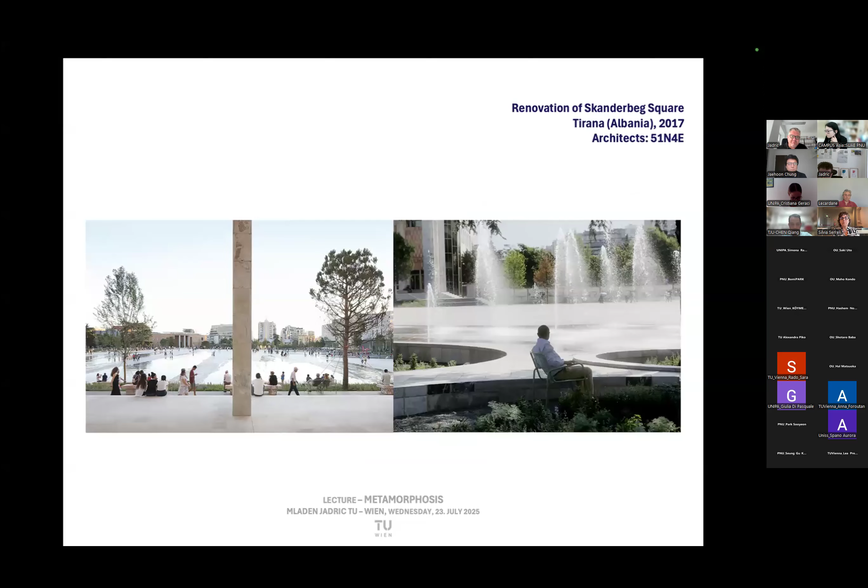It's extremely important that these public spaces have to be built and made for the citizens.

One example from Shanghai, the Suzhou Creek, back then in the beginning of the 20th century, it was one of the biggest industrial paths in Asia, if not in the world. I think 2.5 miles long, so really one factory after another.

Nowadays it's turned into a kind of cultural landscape with a lot of public spaces and nice areas for the citizens. Maybe just to touch on two interesting things, one is the shared space. We call it Begegnungszone, and we have it in Vienna as well.

This is a model actually coming from Copenhagen, somehow how to create a zone which is shared among all citizens without really having priority for the car like we had before. So here public transportation and pedestrians have real priority, and cars are allowed to pass through but at very reduced speed, with public transportation from time to time. But between the streets it somehow recovers and became again a public space available to everyone.

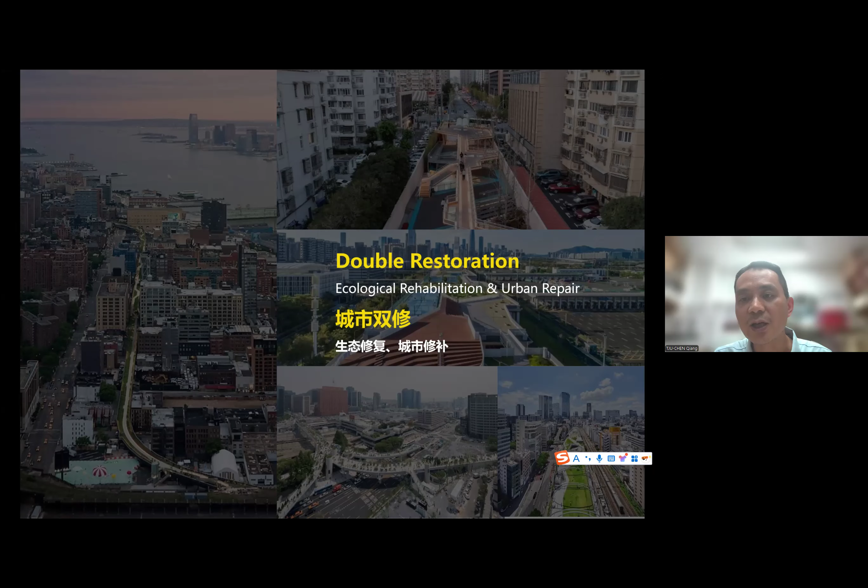The government proposed the double restoration plan 10 years ago, including two aspects: one is ecological rehabilitation, and the other is urban repair. Here is an example.

We will go to the first topic about ecological rehabilitation. During the fast urban development in the past, ecology and the environment were greatly impacted, resulting in a large amount of abandoned mining sites, industrial areas, and municipal facilities.

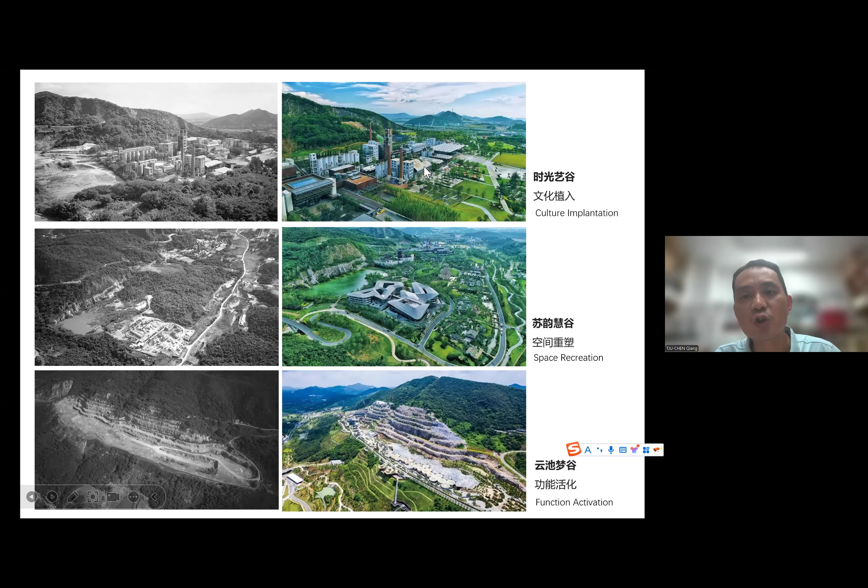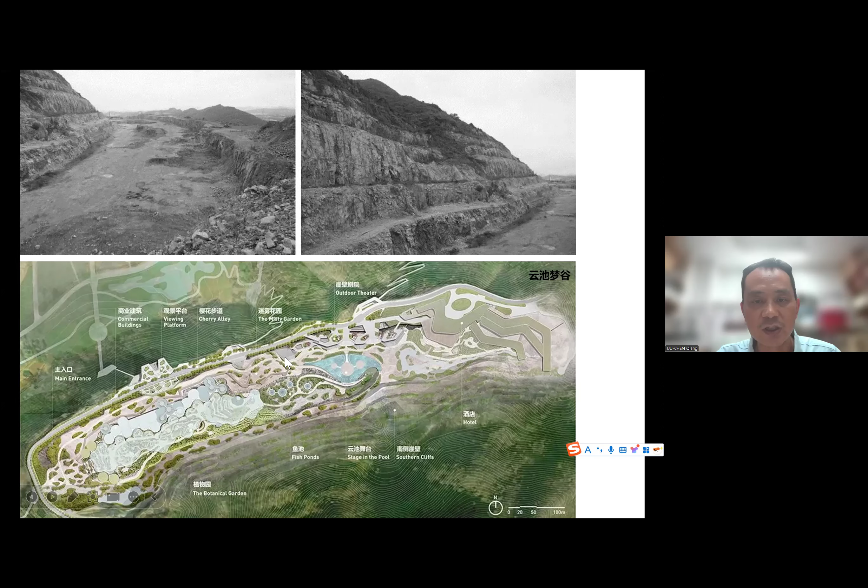Here is the previous image of the quarry. In the middle of the quarry was a botanic garden surrounded by a hotel, theater, pond, platforms, and commercial buildings. This is the botanical garden, covered by semi-transparent ceilings, just like wind in the sky.

You can see some of the silos were transferred into commercial space. This is an image taken from the hotel, and you can see the outside stones.

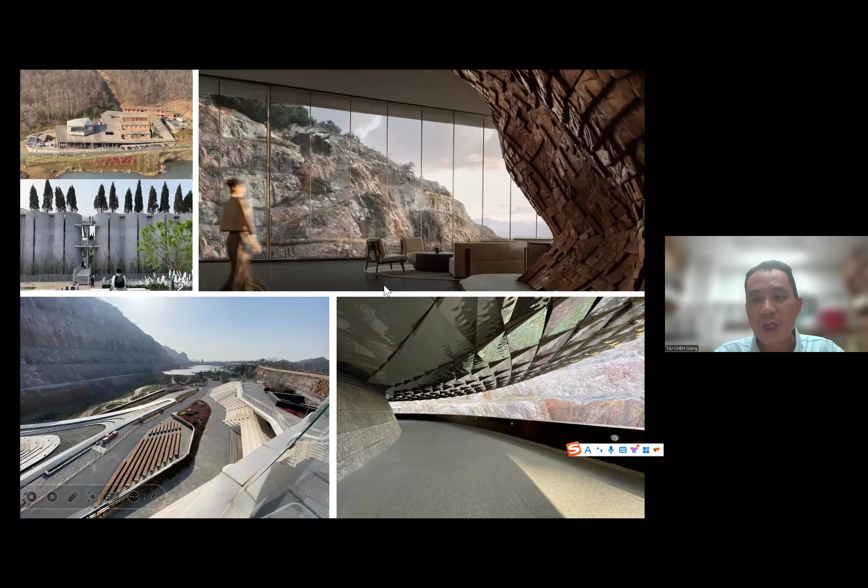So the big cliff is also transformed into the first realistic lighting show in the world at night.

Here is another example, the National Archives of Publication and Culture in Hangzhou. It is designed by Wang Shu, the first Pritzker Prize winner in China. You can see the small mountain was carved just like a basin.

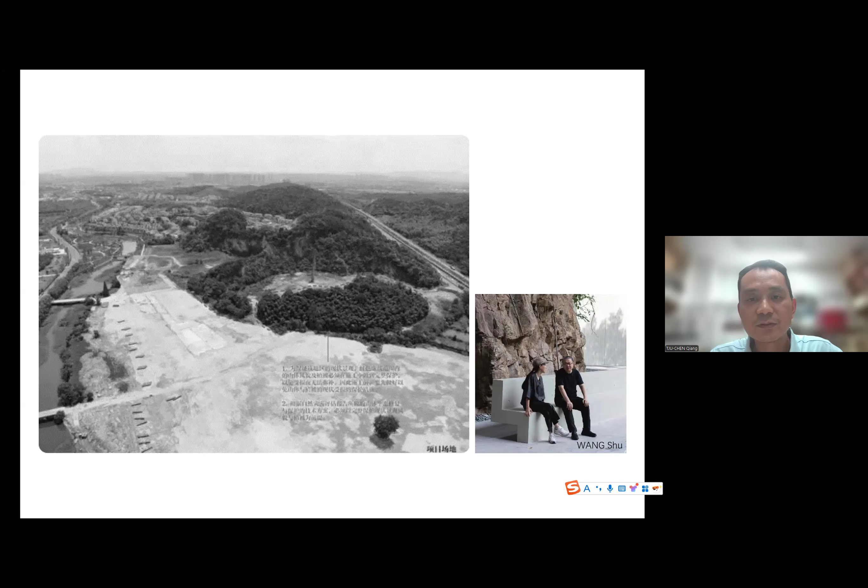The idea comes from Chinese traditional paintings. You can see in the middle there is a water pond surrounded by corridors along the mountain, and some pavilions located on the site. Some of the pavilions will be placed in the middle of the mountains, just like a Chinese painting.

So this will be a very wonderful landscape about the architecture and the environment. Also, Wang Shu will always do some experiments about materials, such as rammed earth wall, ceramic board screen, and timber roof. All these materials come from Chinese traditional ideas.

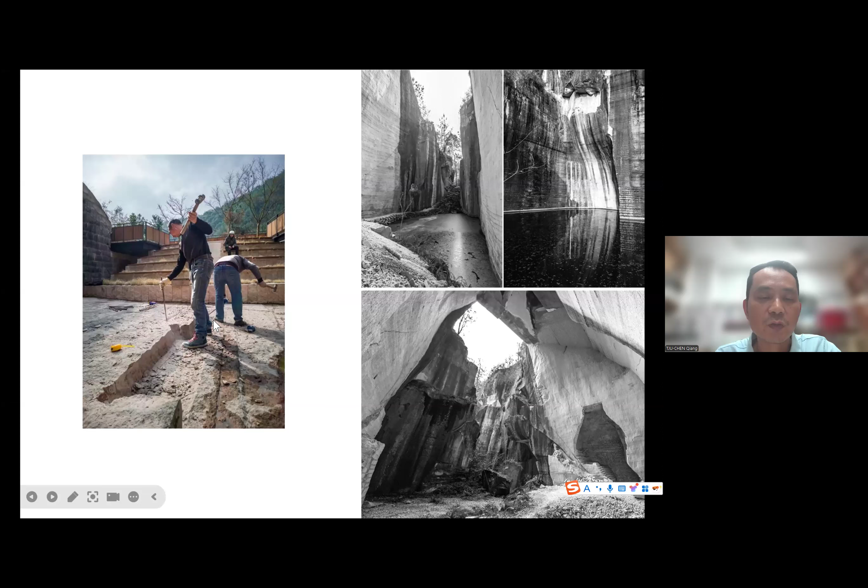Here is another project about the quarry. This is the better view of the Jiyun mountain. You can see there are many holes in the mountains. All these holes were dug out by the local people, just like this. The local villagers would get stone from the mountain, and a very special space was created, so it can be transferred into a performing space, a swimming pond.

Also a reading space. So it will be very interesting - the ecological rehabilitation will bring it about. We will rebuild the harmony between human beings and nature through ecological rehabilitation.

The next one will be urban repair. Here are three aspects about urban problems. One is how to deal with industrial heritage. The second will be wasted space and elevated roads. Also, we'll discuss traditional residences, such as Lilong in Shanghai, the courtyard houses in Beijing. So we should consider more about development and preservation.

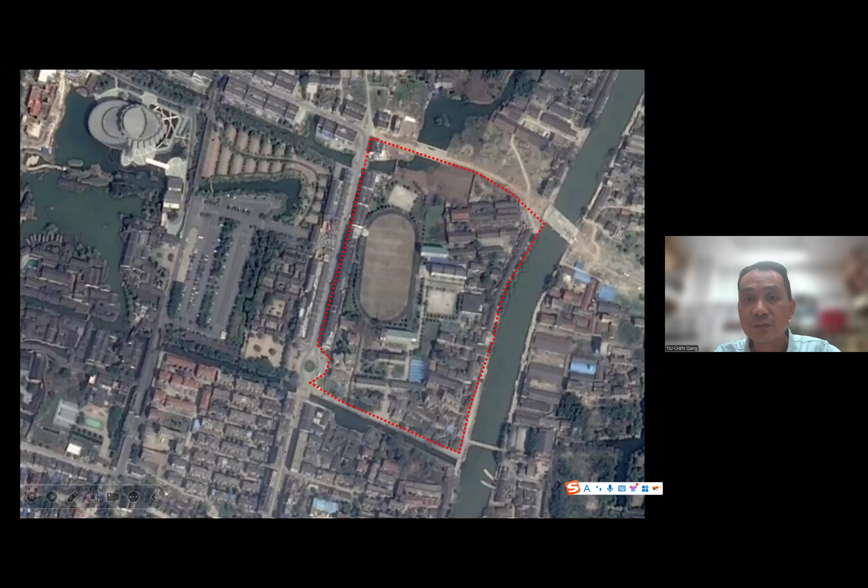So we designed 3 new buildings. This part is the old buildings, and we also kept all the trees. The first one is the entrance, small pavilions, and you can see an outdoor exhibition space was created by our new buildings and the old ones. Here is another new building - the main function is coffee and gift shop.

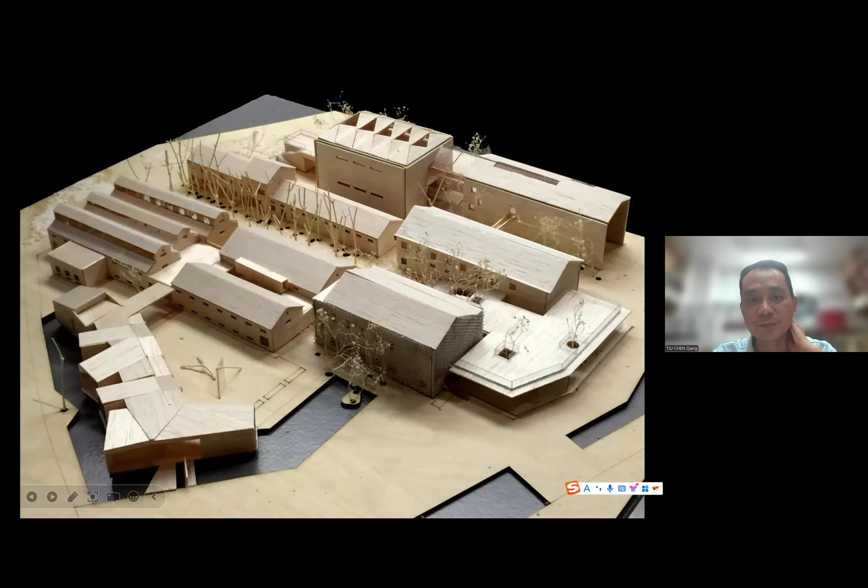The third one is the gallery, a new gallery along. And you can see there is an artistic space created by the old buildings and the new buildings. And this is the interior space - the old roof was all kept, as well as the structure.

In the middle, there is a waste garden, so we designed a big staircase with several holes to keep all the trees.

And this is the image of the coffee space. You can see the new buildings and the old buildings. The two-floor old buildings are covered with a semi-transparent mantle, and it will bring a new experience to the old buildings.

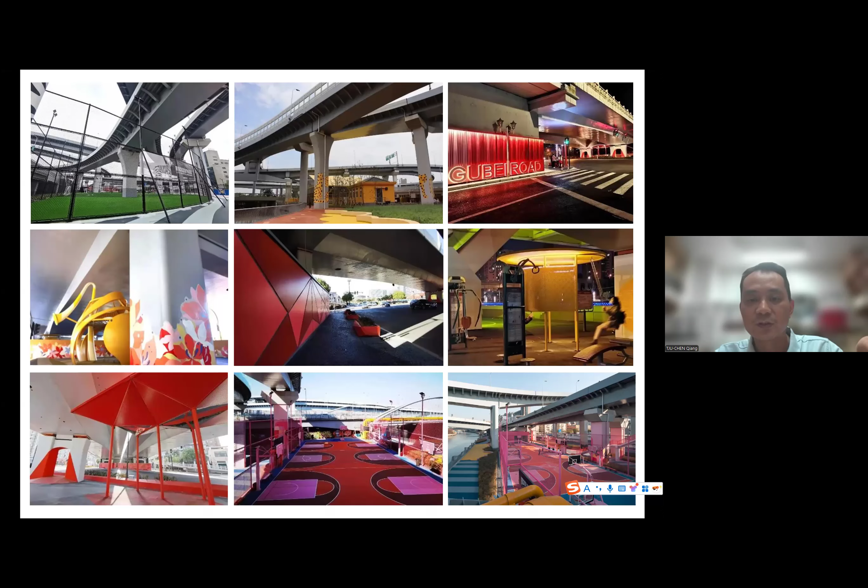Also, you can see mostly in Shanghai, the space under elevated roads will be transferred into sport space. Here is a very interesting case in Shanghai - a space under the bridge of Gubei Road. You can see there are some performing spaces and coffee shops. During the epidemic period 4 years ago, this space was used as a shelter for homeless people.

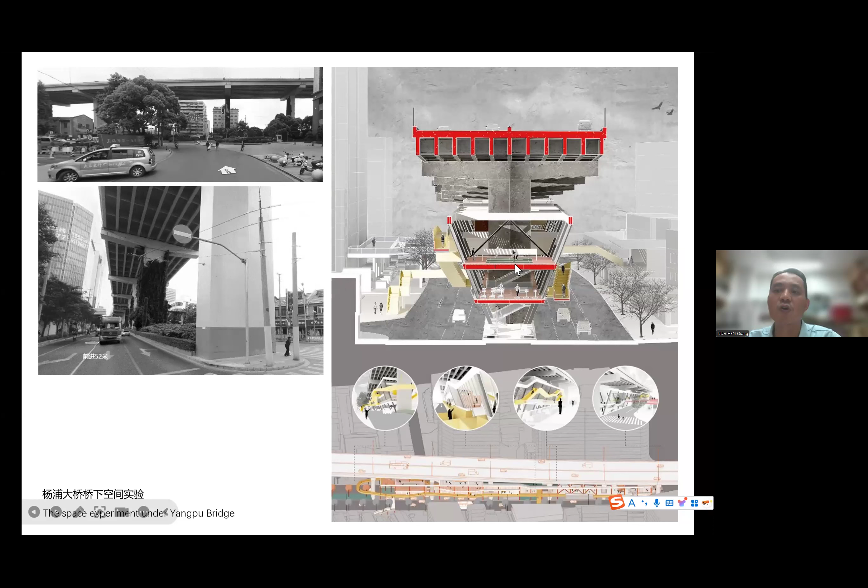We also direct our students to do some experiments about this topic. For instance, this is a case at Yangpu Bridge. You can see the road was very high, so how do we use the space under the road? It will become a sport space with three floors, and also a hub to connect both sides with bridges.

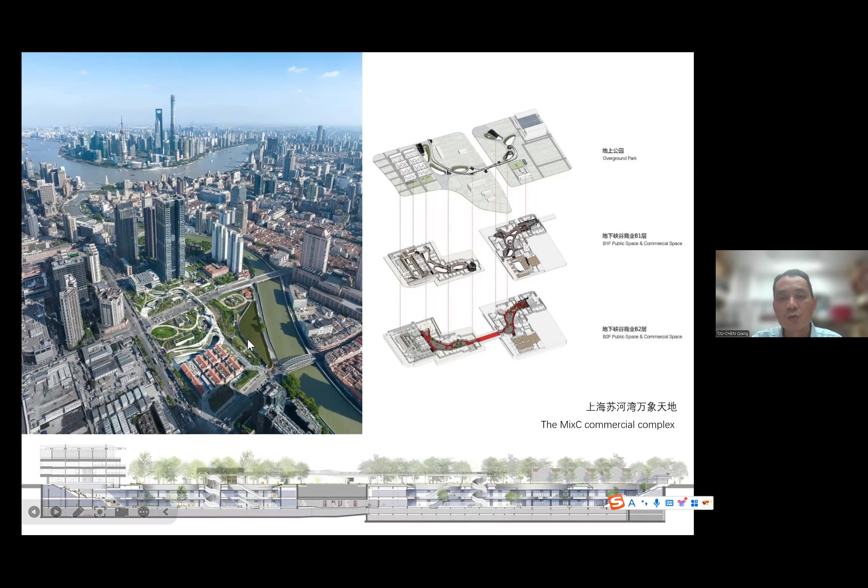As for the traditional residential space, this is a project about how to deal with them. This is the Suzhou Creek, and here is Huangpu River. Previously, this area was covered by the Lilong, a typical residential type in Shanghai. And now it is an open park.

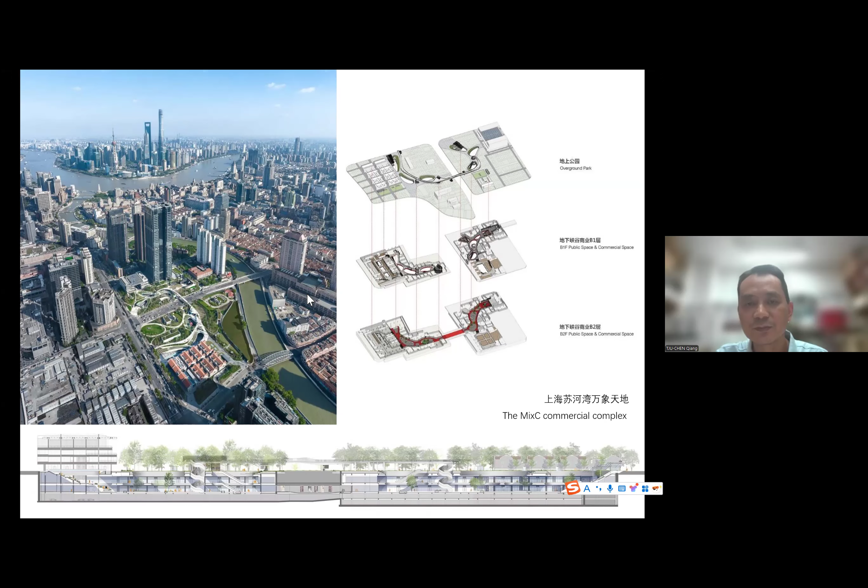But you can also see some small part of the Lilong. Here is a high-rise building designed by Norman Foster. Most of the space is used underground for special commercial space, and there are 2 floors underground.

And these buildings are not the old ones. They were just removed to leave space for the underground space, and then a new one will be constructed just like the old styles. Here will be the underground and the ground space.

Here will be another case about how to deal with the Lilong in Shanghai. You can see all the houses will be kept and will be moved to a different space. Also there are 3 floors underground space that will be used.

Some of the buildings are used for famous brands such as LV, Dior.

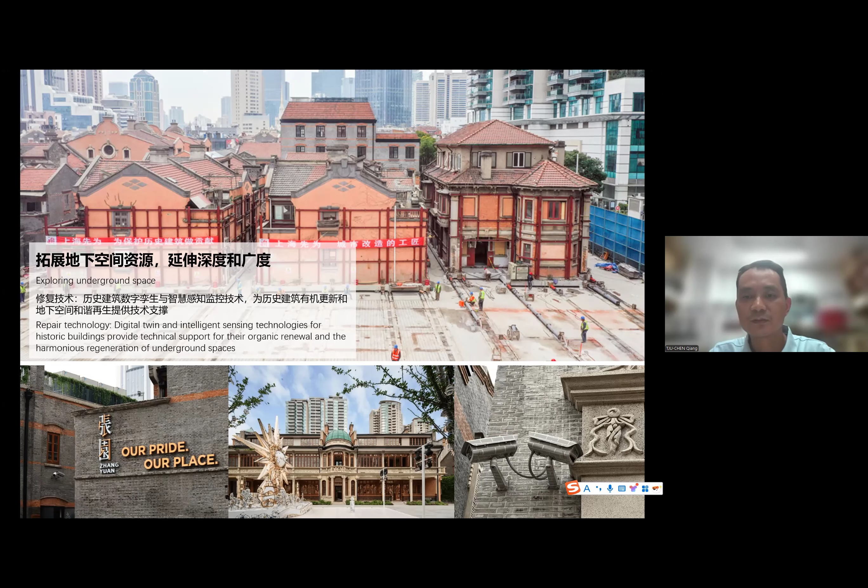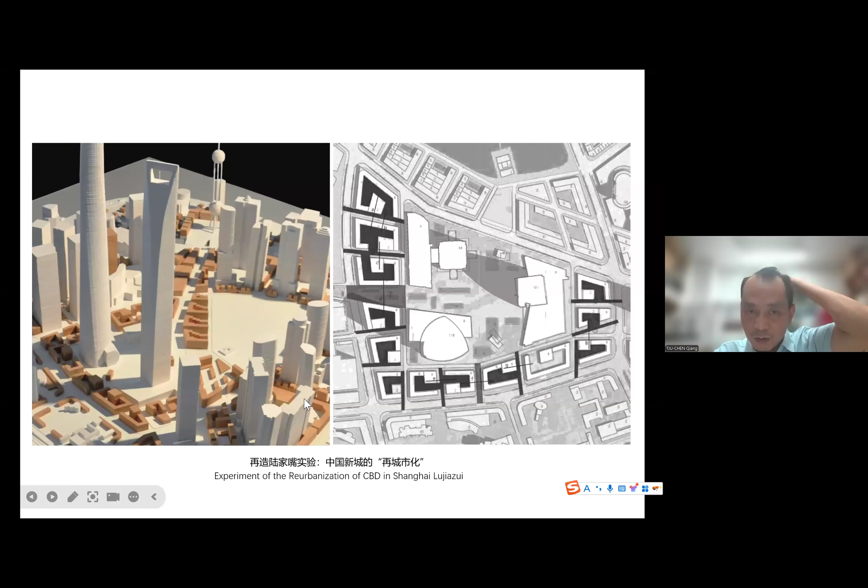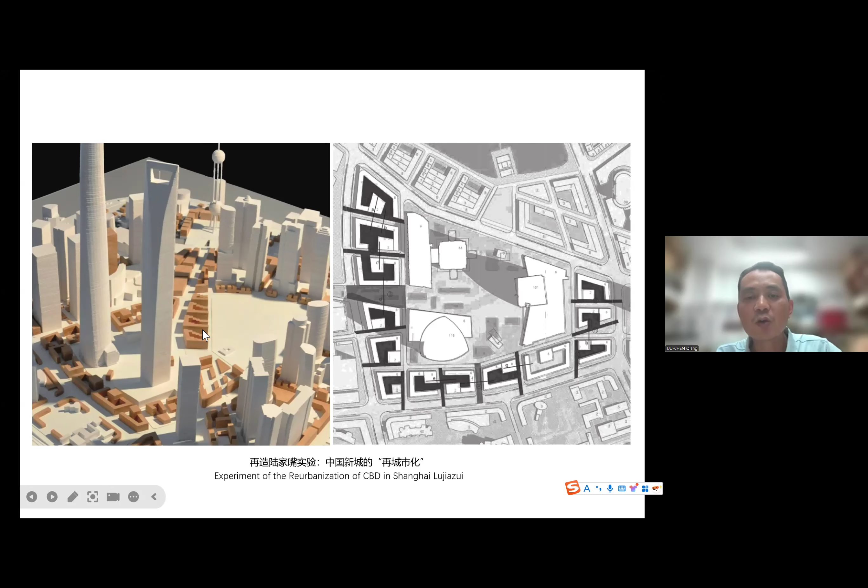For example, the wide road is not suitable for human beings, and buildings are separated. So we also did some experiments about how to deal with the huge space between the high-rise buildings. We created these small blocks to narrow the road, making it more suitable for pedestrians.

So we'll go to a very important case in Shanghai: the riverside renovation of Huangpu River. This is the map of Shanghai. You can see this area is the central district of Shanghai, and there is a river, Huangpu River, dividing the central district city into two parts. Here is Puxi, and this is Pudong.

In the previous days, the Huangpu River was a very important transportation route for the industry factories, and the waterfront was occupied by different enterprises.

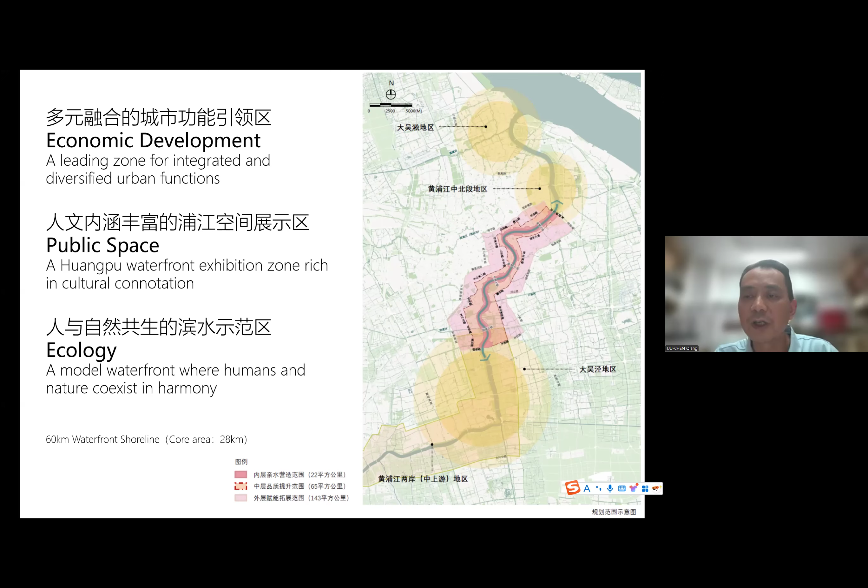The core area will be divided into 5 parts. One is the vibrant waterfront, and the second is the CBD - here is the CBD of Pudong, and the left side is the bund. The second part will be the global living room, and the third is the culture creative chain. The fourth part is about the artistic waterfront, and the last one is about the charm water town. So there are different parts with different topics.

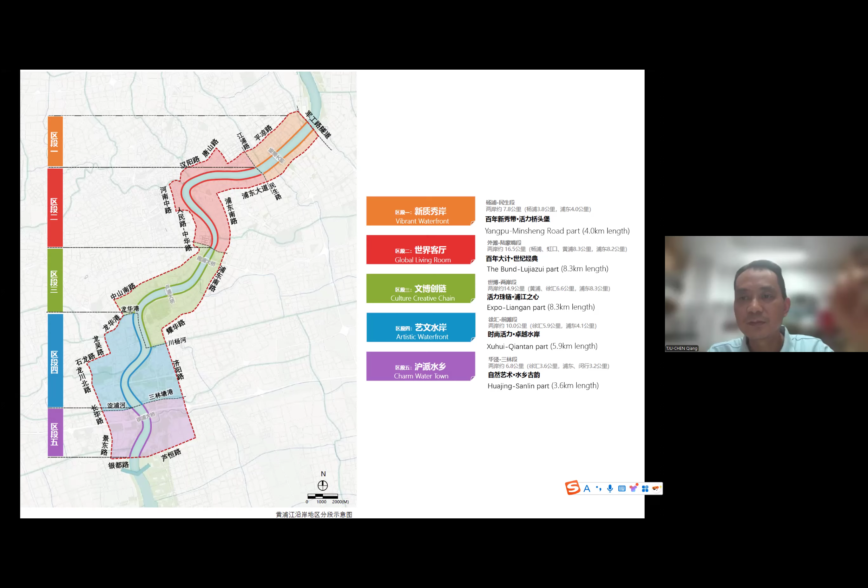And the length is about 7 kilometers. Along the riverside, there are many famous landmarks designed by architects from different countries.

For example, the West Bund Museum is designed by the British architect David Chipperfield, and the shipyard was designed by Kengo Kuma. The Museum of Art Pudong was designed by French architect Jean Nouvel. And this building, Shanghai Grand Opera House, will be finished this year. It was designed by Snohetta.

So all the important buildings will be very diverse spaces for all the citizens.

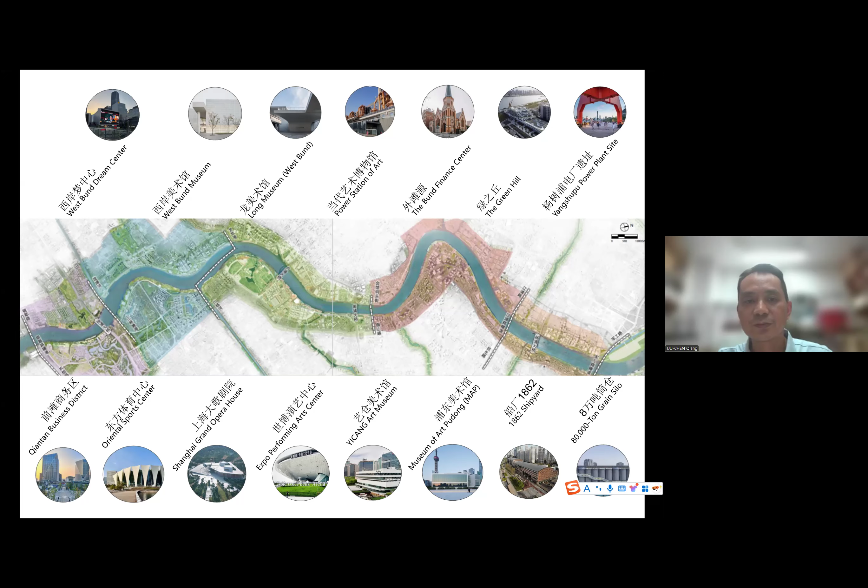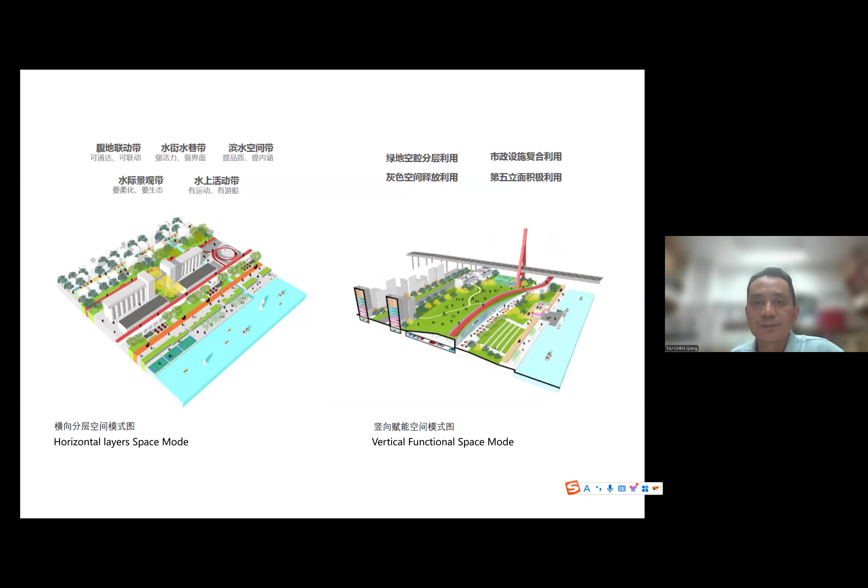I will select some of the cases. Here is the Green Hill designed by my colleague, Professor Zhang Ming. It is located in the Yangpu district. This is the previous volume of the buildings - it was very big.

In the design, the architect set back the volume and created many different platforms to view the river. The shape is just like a hill, so the name of the project is Green Hill.

You can see a new road running across the buildings, at the top and at the bottom. And also you can go to the roof along the buildings.

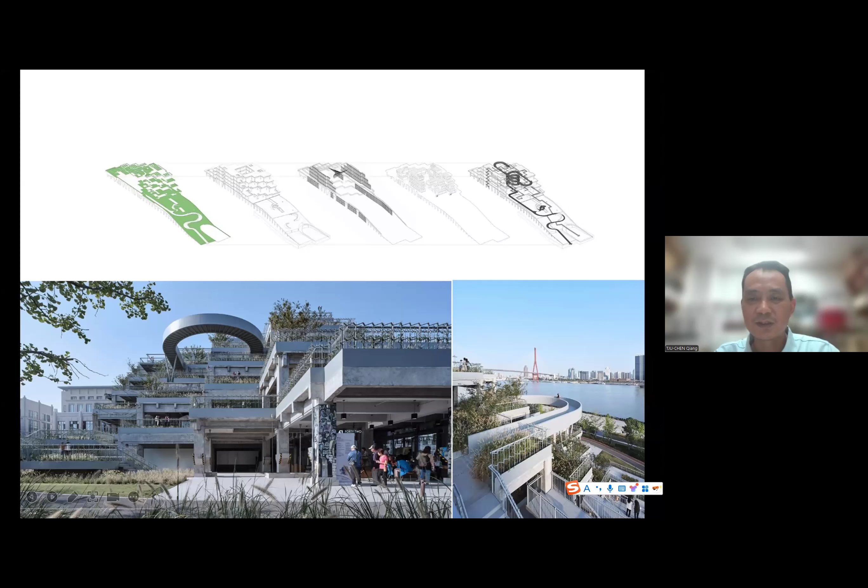Also there are almost 22 service stops along the riverside. Almost every 1 kilometer there will be a stop.

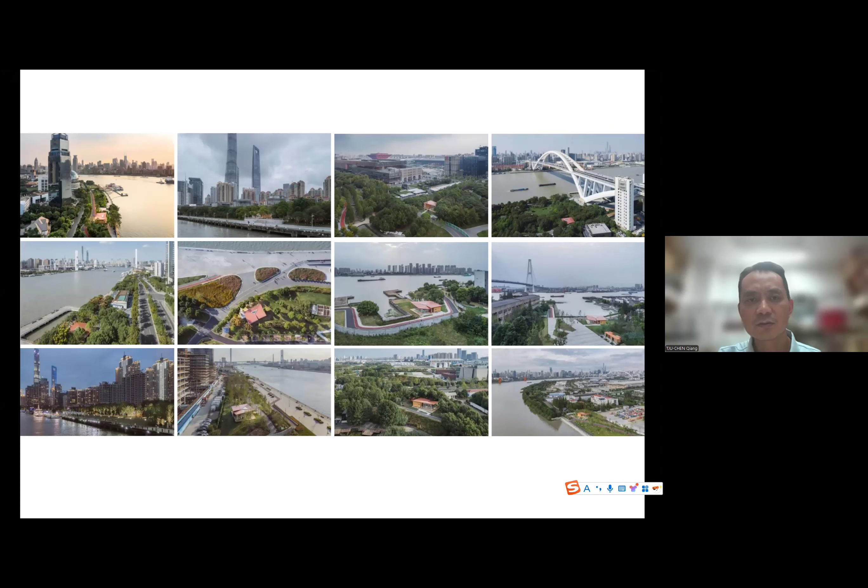Here is the image about the stops in different environments. The stops will provide rest space, reading rooms, and rest rooms. It will be a part of the people's daily life.

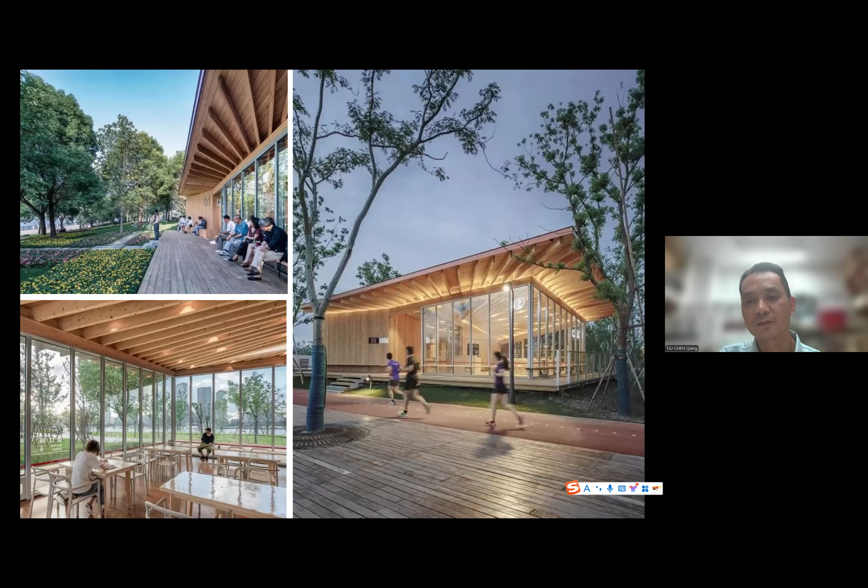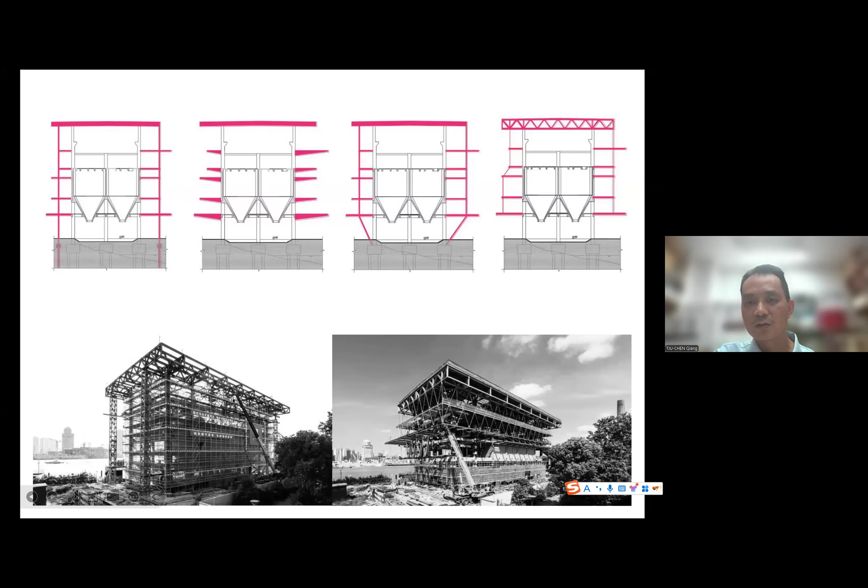Meanwhile, different platforms were created to view the beautiful scene of the river. And from outside, you can notice some of the structure of the building and the platform.

Okay, I will go to the last project, designed by my studio. This project is very small, located near this building, the Modern Art Museum, just here. It is a very small exhibition about our graduation project.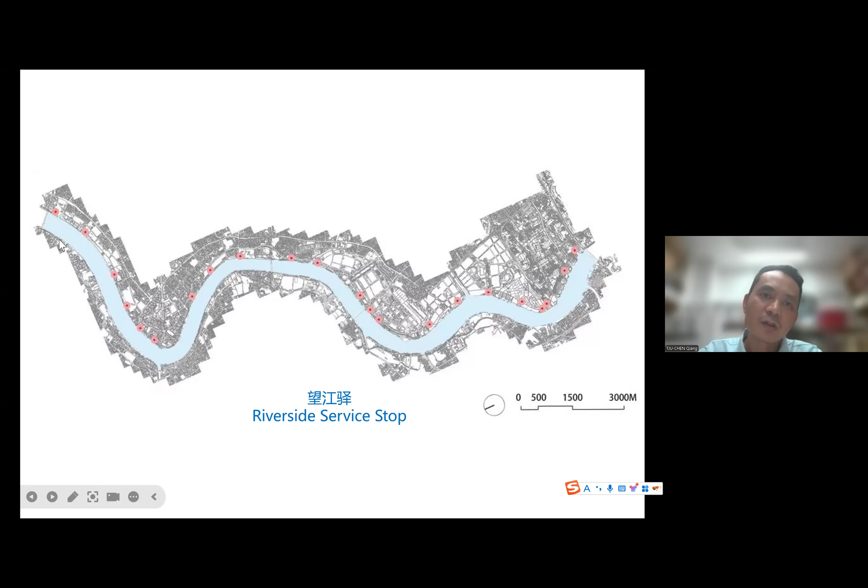The epidemic, ah okay yeah. I've been visiting Shanghai in the last 10 years, like 20 times, tracing every change of Shanghai. I don't know how many participants in this workshop have been to Shanghai before, but for architecture students who want to learn architecture, everyone has to visit Shanghai, I believe.

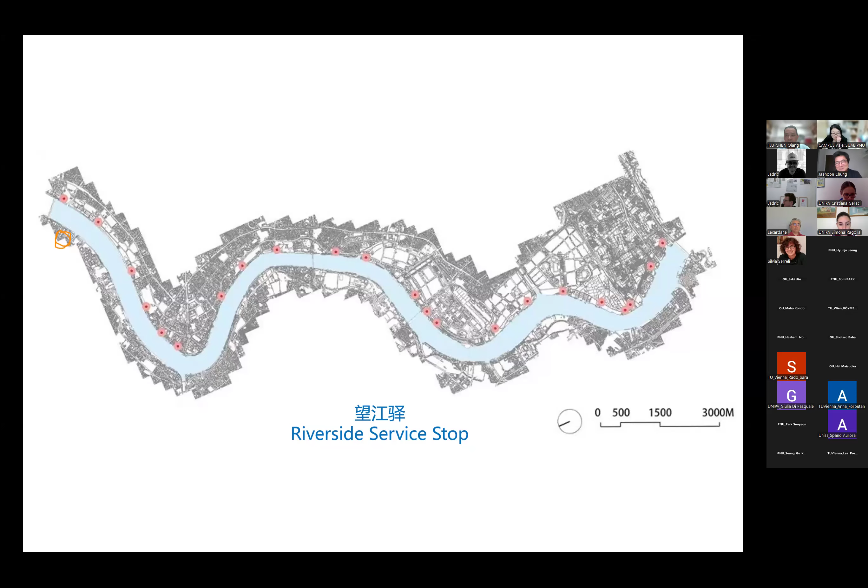The last time Professor Kim and I visited Shanghai last month, we saw the Linong plate is moving to build underground. So everything is possible in Shanghai, no limitation of imagination. If an architect imagines it, it gets realized. Very impressive. And your project shown today is also very impressive.

Thank you very much, Bastian. Thank you. Okay.

The civil engineering level shocked me yesterday and today. Yesterday, Professor Aitani showed a whole island made of Inujima granite—they just took granite to fill up the Osaka ocean. And today, China lifted up a whole village to build an underground development 20 meters underground. So this is what's happening here.

Anyway, I don't know if Olbia has a quarry. I know this port sends out granite or marble to Europe, but I don't know if there's a quarry on our site map—we need to check it out. So some Chinese students can get an idea from the land itself. Professor Chen also finds a solution from the land. When you feel the atmosphere, you're the architect. So I hope we should visit Olbia as soon as possible to give a solution.

Thank you very much. Thank you.